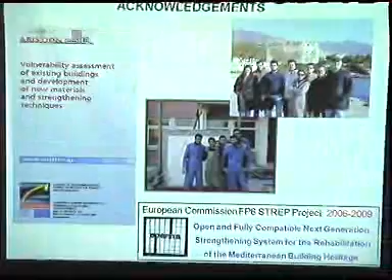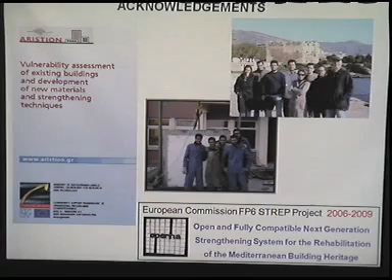Before starting, I would like to acknowledge the contribution of many of my students and colleagues at the University of Patras, and also to mention that most of our research findings have been supported financially by a couple of national projects, the main one being this one, as well as by a European project, Opera, which was coordinated by Tecnalia and expired a couple of years ago.

I'm afraid my presentation will be a bit more technical. I promise not to show any equations, but you know, I am a materials guy, so I cannot avoid going into some details regarding the mechanical behavior of materials and structural elements.

After giving a brief introduction, I will talk about this new generation of materials, the so-called textile materials, textile-based composites. We will talk about the application of those in concrete structures, specifically dealing with confinement of concrete, shear strengthening, and flexural strengthening.

Then I will talk a little bit about masonry structures, how those masonry buildings can be retrofitted and strengthened with textiles when subjected to either in-plane or out-of-plane actions. Of course, my conclusions will come at the end.

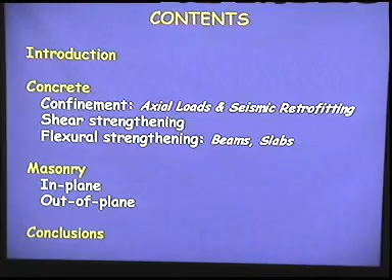Today there is a tremendous need for upgrading our houses, our structures, due to environmental deterioration. That's one reason. The change of use is another. And seismic retrofitting is, of course, a very important reason.

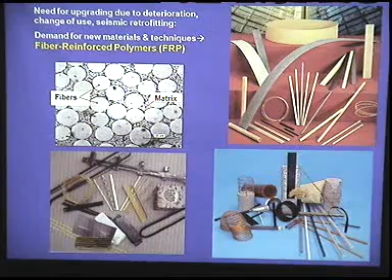This is a well-known method, one of the most innovative techniques today, which has been applied with great success. You can see some examples here - typical buildings strengthened in flexure with extremely lightweight strips.

There is no need for scaffolding here. Those elements based on carbon fibers are bonded on slabs or beams. Similar products made of glass or carbon or aramide fibers are used to wrap columns or beams to strengthen them, to provide confinement or shear strengthening in the case of beams.

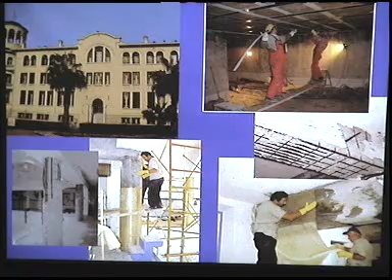Those materials have also been applied in historical structures, in monument-type structures like masonry structures, to strengthen them against earthquakes. For example, you can see a shear-type masonry wall strengthened here with CFRP laminates, masonry columns in churches confined with fiberglass. This is a photo before and after the intervention, and also arches consolidated with lightweight carbon-based strips.

Those materials and the associated technique have many advantages, some of them being the very low weight, the extremely high strength in comparison with steel, the fact that we don't need to protect them. They are quite durable. We can easily apply them in practice, etc.

However, we have a number of problems, a number of disadvantages. Namely, they have relatively poor behavior at high temperatures - well, not so high, at temperatures which exceed the so-called glass transition temperature, which is about, say, 70 or 80 degrees.

We cannot apply them on wet surfaces. They are not very permeable, which might be a problem when we deal with monuments, with historical buildings, and they are not compatible with substrates such as those in monuments and historical masonry structures. Last but not least, we cannot perform assessment behind those materials in case of strong earthquakes - we don't really know what is happening behind those FRP jackets after a strong earthquake.

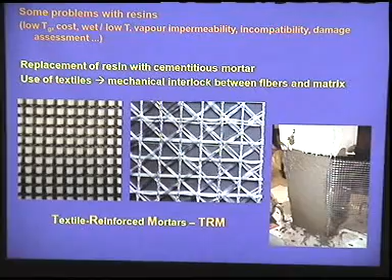So we started about 10 years ago with plain concrete cylinders confined with either FRPs or those materials. I should go back to give a definition, a name for those materials. We use the term TRM, textile reinforced mortars. So we wrapped concrete cylinders with FRP and then with TRM, and we looked at typical stress-strain plots.

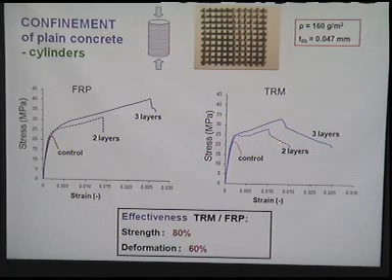Red curves show the response of unconfined concrete, blue shows the response of concrete confined with FRP here, and with TRM there. We see that TRM is not as good as the FRP in this particular case in terms of strength and deformation capacity. But if we compare it with the control specimen, the one without confinement, it is quite good. We have an increase in strength, and a dramatic increase in deformation capacity.

Then we moved to larger structural members. We looked at columns, at what is happening at reinforced concrete columns when subjected to earthquakes, to seismic action. A typical failure scenario is buckling of the longitudinal reinforcement at the ends due to heavy compression stresses in those compression zones. An easy way to prevent or delay that is the so-called local jacketing, wrapping the ends with fibers in the circumferential direction. Of course, this is done today with FRPs, and we try to do something similar with the TRMs.

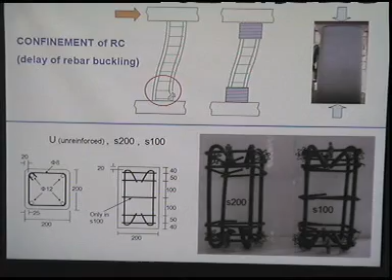To have a good understanding of that, we started with small prisms, small cross-sections, 20 by 20 centimeters, confined with FRPs and TRMs. I'll show you some photographs.

You see one of those confined with the TRM system, an identical specimen wrapped and confined with the FRP system. Those systems are equivalent, with exactly the same amount of fibers in the circumferential direction. The only difference is in the matrix. Here we have epoxy. In that case, we use a cement-based matrix to bond the fibers.

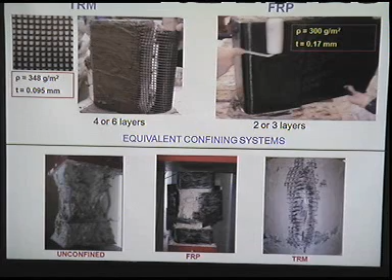We started with uniaxial compression testing of those members. You see buckling of the internal reinforcement in the unconfined members, and fracture of the FRP, but also of the TRM jackets in the confined specimens. The fact that we have this fracture is the best proof that the materials are fully utilized, that we can utilize the full strength of the fibers.

We don't have to look at all those curves. Just remember that in each family, green is the response of the concrete prism without any jacketing. Blue curves correspond to the specimen with TRM jacketing, and red curves correspond to the specimen with FRP. If you compare blue and red, they are not that far apart. The effectiveness of those systems is similar to that of the FRP system.

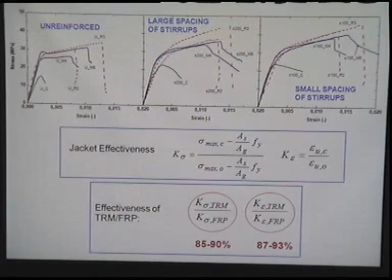The next step was to verify exactly the same failure mechanism in larger scale members. We tested full scale columns, cantilever type specimens subjected to horizontal displacements to simulate the effect of earthquakes. You can take a look at some photographs here. Those specimens were confined only at the bottom with FRP or TRM jackets.

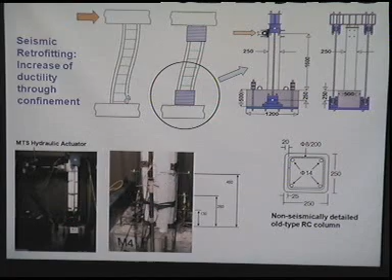I have some results illustrating how the control column, the one without jacketing, behaved. We have a relatively sudden fall in strength due to buckling of the longitudinal reinforcement at the base of the unjacketed member, whereas in the FRP or TRM jacketed columns, we have a much better, much more ductile response with stable hysteresis loops and dissipation of a substantial amount of energy. We could conclude that the two systems are practically equivalent and much better in terms of deformation capacity compared with the control specimen.

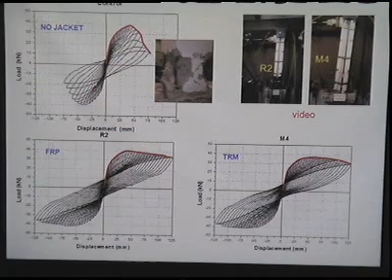The same concept was tested in a nearly full-scale building in our laboratory. We made a two-story reinforced concrete frame, tested before strengthening but also after strengthening with those TRM jackets, applied locally only at the ends of columns to provide ductility. The building was tested up to 0.45 G after retrofitting — that's a substantial acceleration, a relatively strong earthquake. The conclusion was that the jackets behave extremely well.

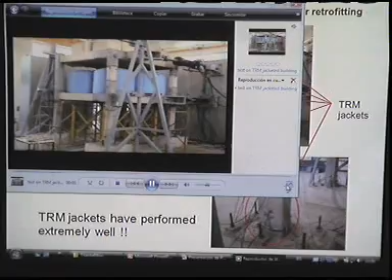I think I have a very short video that illustrates how the building was tested. If I manage to play that, okay. You see loading of the building and without any failure at all in the jacketing system.

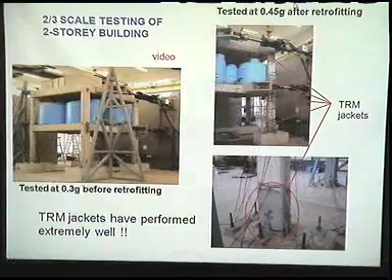We did similar tests to prove that those materials can also provide very good confinement at the base of columns when we have lap splices, which is quite typical in old reinforced concrete frames.

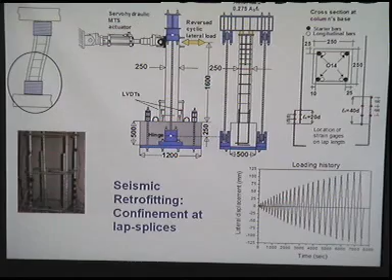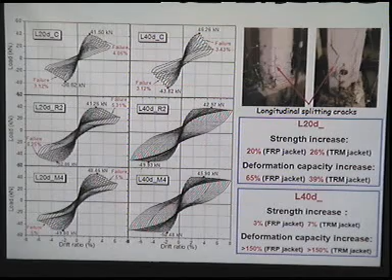Our conclusions in that case are exactly the same: both TRM systems and FRP systems are practically equivalent. They provide the same level of confinement at those lap-spliced areas.

Our next step was to combine those confining systems with longitudinal reinforcement applied on columns to provide flexural strengthening. So we confine columns strengthened in flexure, confining them with TRM at the base.

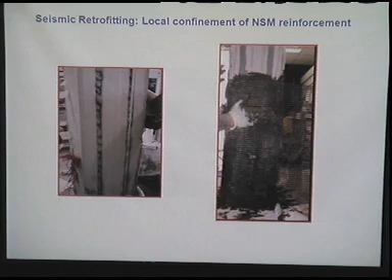Again, it was interesting to observe that, compared with the control column, there was a substantial increase in the flexural capacity due to this external confinement.

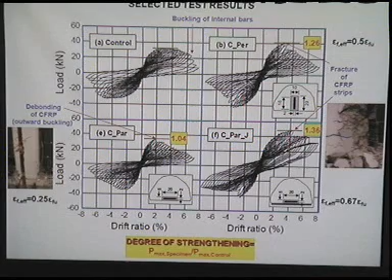The next step was to work on shear strengthening. I've been talking about confinement so far, but shear strengthening is quite frequently critical in beams and columns, so we designed members that would fail in shear intentionally.

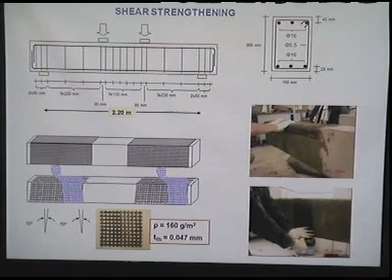The failure mode should be shear, a brittle one, and those members were tested before and after strengthening with FRPs or TRMs. You see a typical brittle diagonal shear failure of a beam without any strengthening in the shear span.

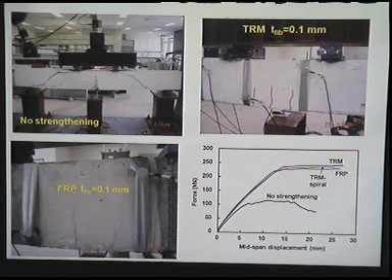That's the response in terms of force versus mid-span displacement. This shows how those load versus displacement curves change, and how the failure mechanism changes from brittle shear to ductile flexural when strengthening in the shear spans is done with either FRPs or TRMs. Again, our conclusion is that the system is equivalent to the well-known FRP system.

The next set of experiments dealt with flexural strengthening of beams. Here, the reinforcement was bonded externally on the tension zone just below the beams to increase flexural capacity. A typical response of a member without flexural strengthening is shown by the black curve.

We see force versus mid-span displacement curves here, showing the beam before strengthening. Blue illustrates how that identical beam would behave after flexural strengthening with FRP, and red is the corresponding curve for strengthening with the TRM system.

So we have an increasing capacity, but perhaps not as high as in the case of FRPs. However, we also have an increase in deformation and ductility compared with the FRP system.

Flexural strengthening of beams with those textiles is probably not a very good idea because we don't utilize the fibers in the transverse direction, so we have to use a hybrid system here.

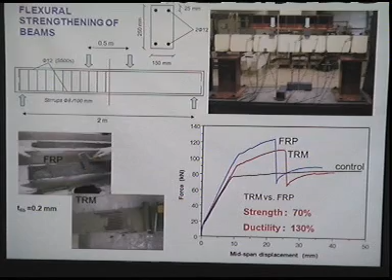But it is certainly a very good idea when we deal with two-way slabs in buildings. Given that we have fibers in two directions in those textiles, we can use them to carry tension stresses in two-way slabs.

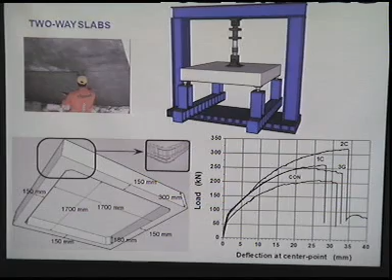And then how the capacity, the flexural resistance of the slab, can increase depending on what type of textile and how many layers we use, etc. Again, our conclusion here is that the system is quite promising also for this case of two-way slabs.

In our last series of experiments, we were interested in looking at the response of masonry, unreinforced masonry structures, especially subjected to earthquakes. But not only earthquakes—wind could also be a possible case, as well as other types of loads.

If we look at how masonry fails subjected to seismic actions, we can identify several different failure modes and the corresponding elements. For example, we have shear walls, masonry shear walls, which fail due to diagonal tension.

We have masonry walls which behave very much like slabs, unreinforced slabs, and they fail in flexure. We have column-type elements subjected to in-plane flexure in combination with axial loading, or beam-type, deep beam-type elements subjected to shear, flexure without axial loading.

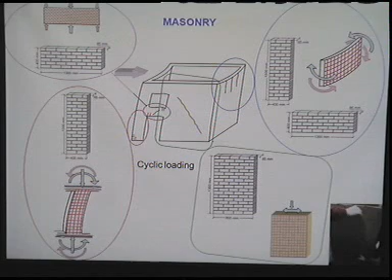So in an attempt to get a better understanding of all those different failure mechanisms, and also with regard to the use of TRMs, we designed several wall-type specimens which we tested in the lab before strengthening and also after strengthening with FRPs or TRMs. I will just give some indicative results to see the comparison between the two systems.

A shear wall, for example, subjected to in-plane shear in combination with axial loading. In-plane shear is provided by an actuator in a dynamic way, so we have cycling of the loading. We always look at load versus midspan displacement curves, just to have a way of comparing the results.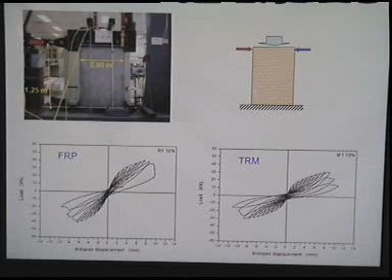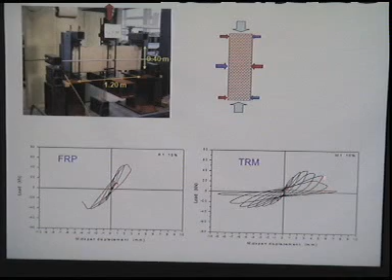When we look at different types of structural elements, that is column-type structural elements with an axial load and cyclic bending and shear, again red is the rather poor response of the control, the unstrengthened wall, and then you see how the strength increases if we use the FRP, and what happens for the case of the TRM. Here we have a dramatic increase in the ductility also.

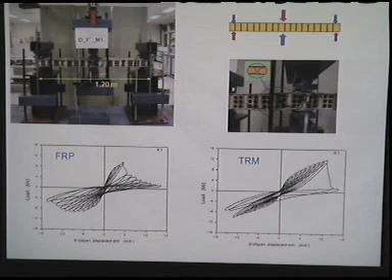Masonry subjected to out of plane, again, our strength is practically zero here in the absence of axial force, but we have a very high capacity if we strengthen the system with the FRP or the TRM.

There are a number of practical applications of the technique already, some on concrete, reinforced concrete buildings, others on masonry. You see some photos here. We can see those textiles in the form of diagonal strips to strengthen masonry walls, or to consolidate domes in historical buildings. This last application is from Greece.

The designer here specified a lightweight jacket to consolidate the dome from above. There was no way to have access from below. That could not be done. It was forbidden to be done with polymers due to the lack of compatibility. It was done with the TRM system, which was anchored on the wall, also using those special types of spike anchors. I think that was my last slide.

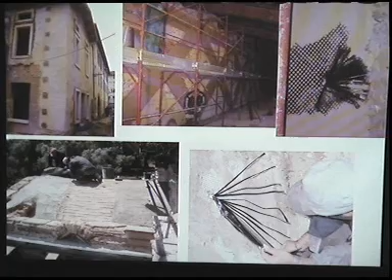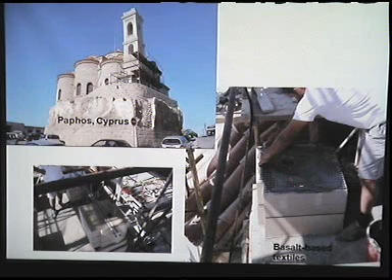Well, that's probably the last one. Another application from a historical church in Cyprus, in the city of Paphos, where this bell tower had to be rebuilt, reconstructed. It was done with bricks strengthened at the interface with a mortar, with basalt-based textiles bonded with an inorganic mortar compatible to the bricks.

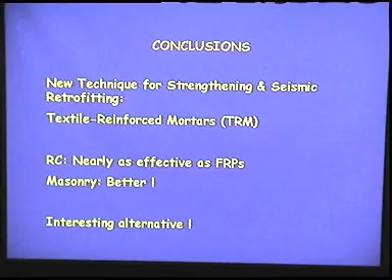My conclusions are that we have at our disposal a new technique for strengthening and seismic retrofitting, in general for the rehabilitation of buildings, using those textile-based products. If we compare them with FRPs, which are well known to the engineering community today, those materials behave in a similar way. They are almost as effective in most cases. In some cases, they are even better, in the case of masonry, for example. And we feel that this is at least an interesting alternative which should be used more and more in the future. With that, I would like to thank you very much for your kind attention. Thank you.